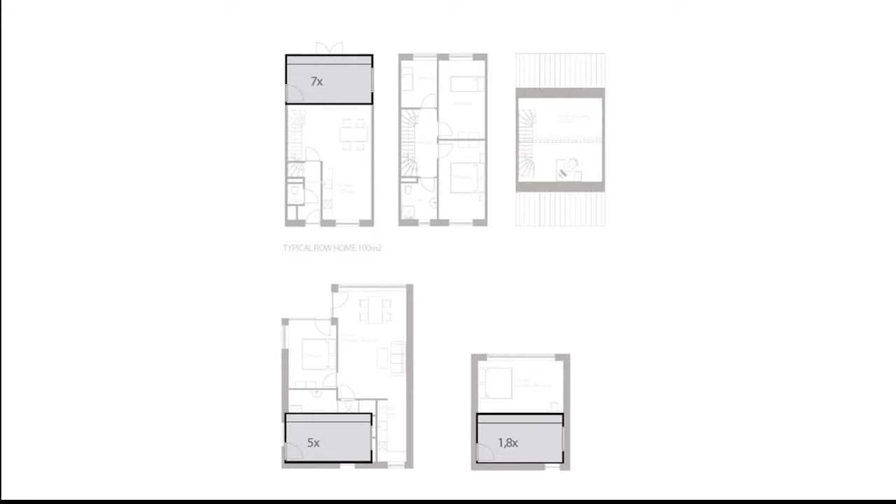Urban wanderers have no place to go due to the tight housing market and tight regulations, while at the same time there are a lot of vacant and oversized buildings. So why not partially use them and optimize them to provide smaller houses, and thus create more houses?

14 square meters is the minimal size that could still fit every living function privately, as later seen in one of the example housing typologies.

And why not evolve from a housing law that no longer fully complies, by giving back the freedom of how to use a space to the actual user, so they can decide what functions they want privately, what they want to share, and make cost- and qualitatively-effective choices.

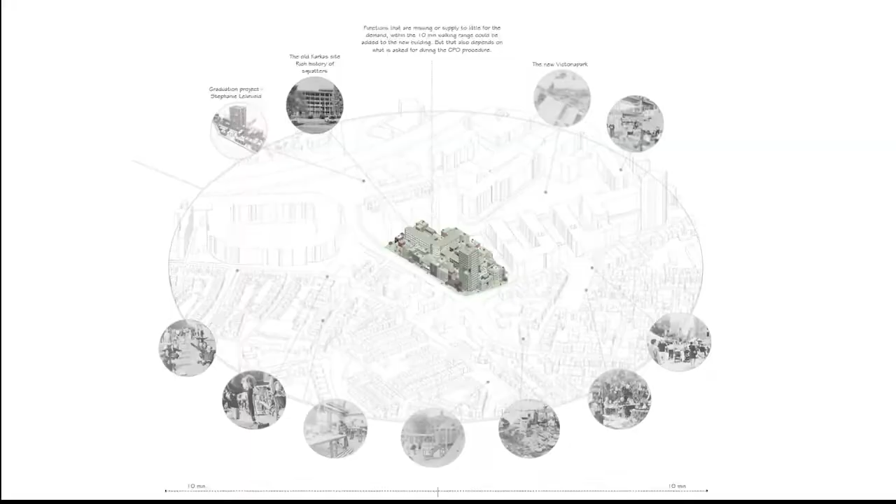The city is a big urban landscape, full of experience in terms of social and professional aspects. Within a 10-minute walking range, you will find a lot of existing functions that you can take advantage of. I know a person that, for example, only showers after going to the gym.

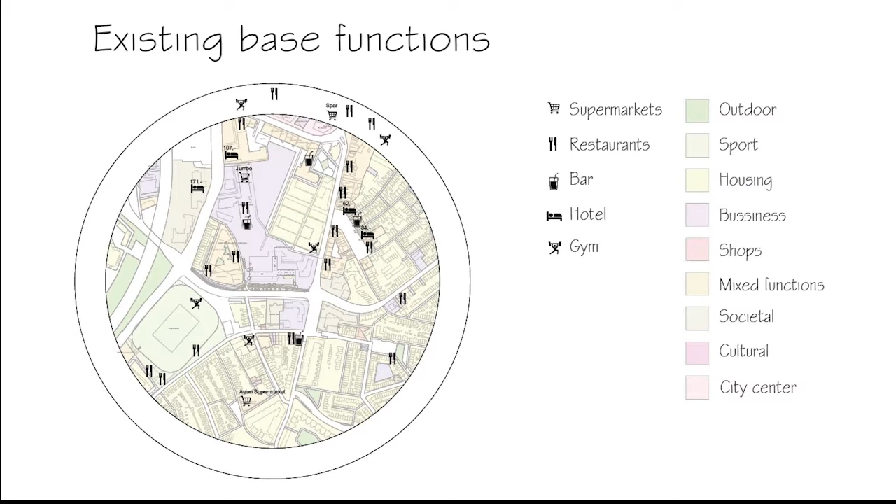He says he rarely ever uses a shower at home, so why have one completely for yourself? You can share facilities or use the spaces within the city that are already there.

The principle of using vacant sites and oversized buildings to fabricate a new architectural model of optimization and freedom of choice could be reflected onto multiple locations.

So now we zoom into the chosen location for this case study project, the old Fuxkas in Eindhoven. A building with a rich history that could be linked back to the time of industrialization. It used to be a former Philips office building, which after its days of glory became a neglected place.

Perfect for squatters to build their home, it on itself became a place full of creativity and optimal freedom. Sadly, the owner thought otherwise and stripped the building down to its core.

And so there the building stood, naked and lost for 12 years long, an eyesore for the locals until its final days. But it didn't have to end this way.

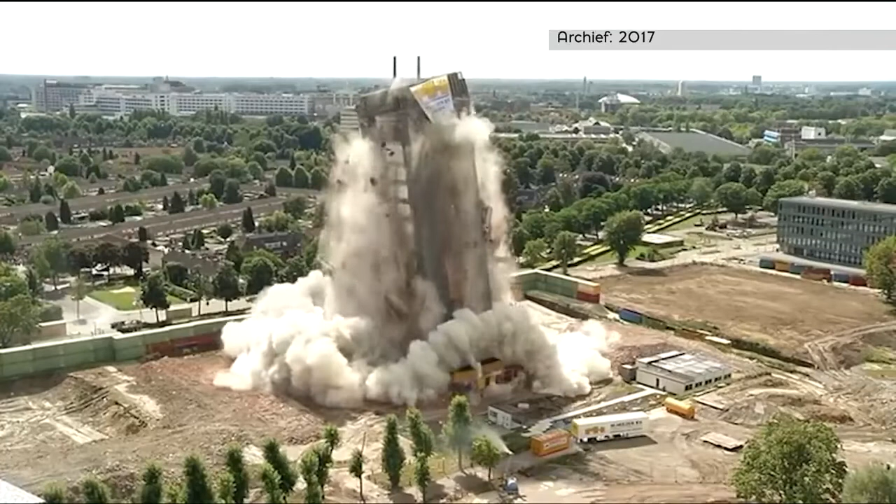Locations like this are perfect for HomeTown, a new approach of home for the urban environment. A building that represents a neighborhood compressed into a high-density, low-rise building.

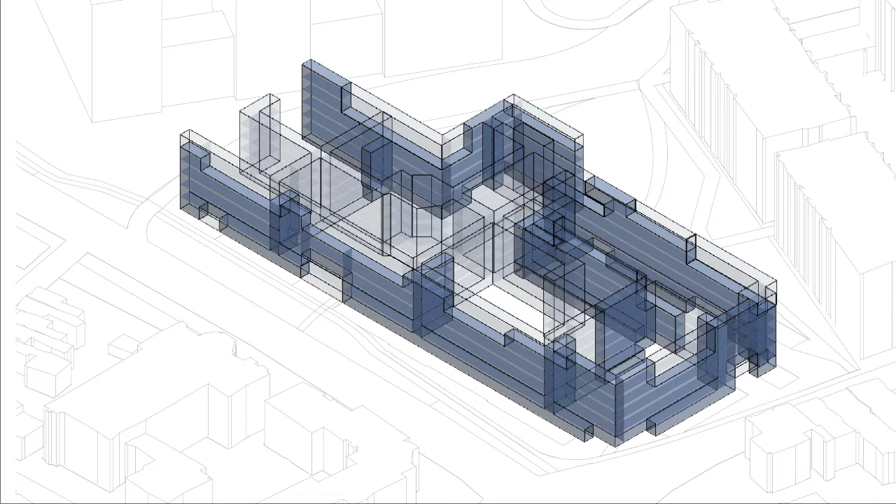With a network of multifunctional collective corridors that are running through the building like streets on a city block, adjacent to the corridors are Casco housing spaces and shared facilities that could be used by all the inhabitants of the building. This compressed neighborhood is divided into smaller communities.

Those communities each radiate their own identity that represents the families living in it. Within those communities, each household has the ability to choose their own living space, the size, what functions they add and what functions they share.

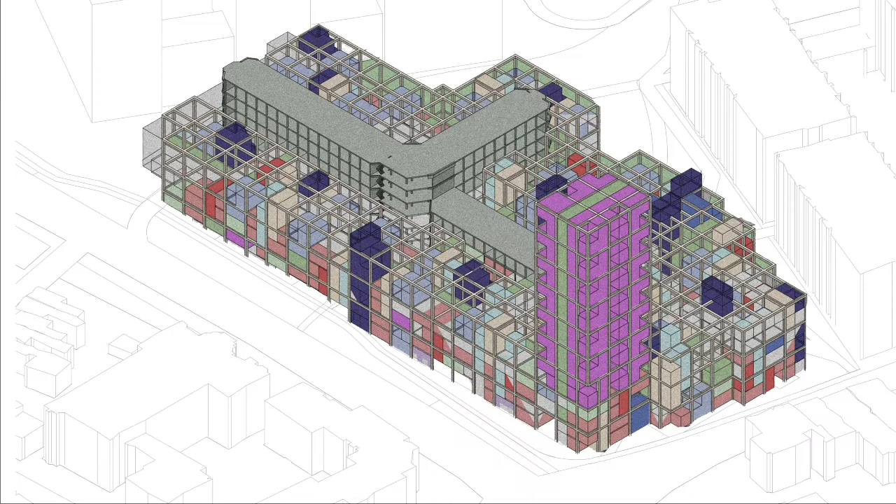The building process could be divided into phases per community, which works through a CPO process. On top of those communities, a network of collective roof gardens are accessible from the shared corridors.

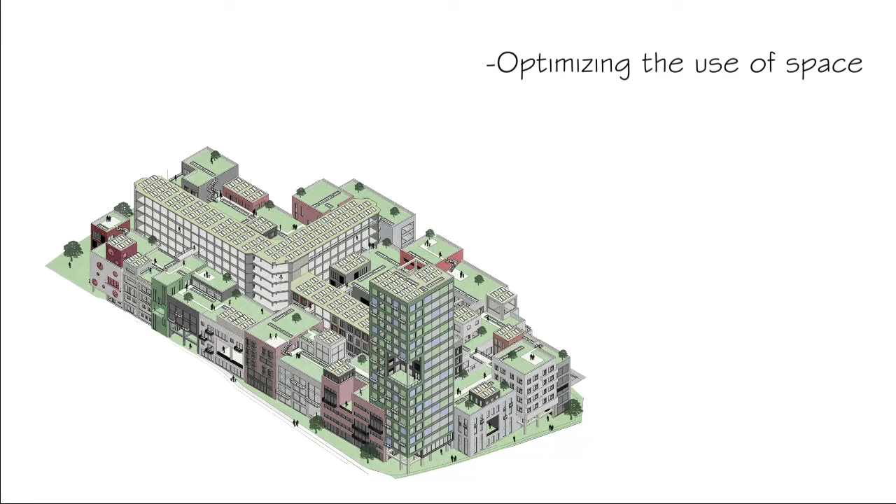The design holds some key principles of optimizing the use of space, making use of the existing functions within a walking range, sharing facilities, giving back the freedom of choice to the user of space on how much space they need, what functions to share and what functions to add, and the possibilities of giving vacant buildings a second life.

Optimizing the use of space could be approached by many different ways. To optimize a plot, there's a few steps to take. First, you start off with a new or an existing plot, which might or might not have a vacant building.

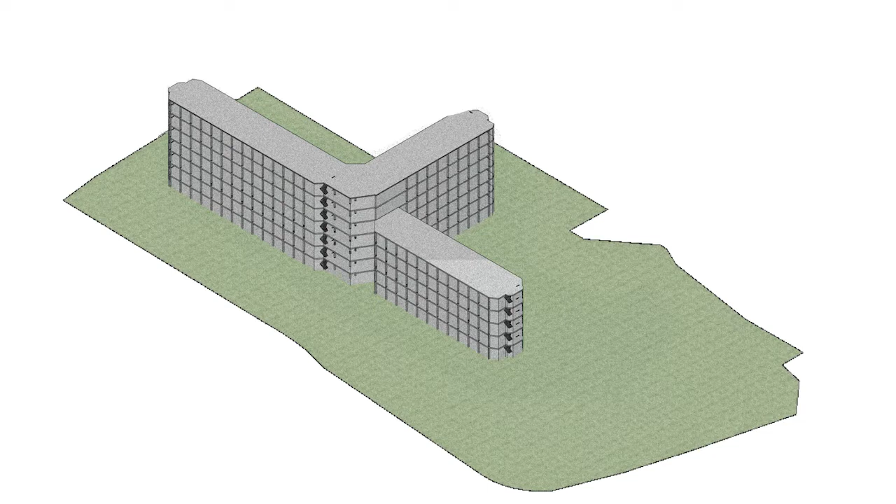Strip that building down to the structural base. Lay a standard building grid of 3.6 meters by 3.6 meters on top of the plot. Fill the plot fully with mass.

In this study, the max height for the highest front door is 4 layers, which is under 12.5 meters to avoid the necessity of elevators. A 5th or even 6th layer could be added when a multiple story typology is added to the highest level.

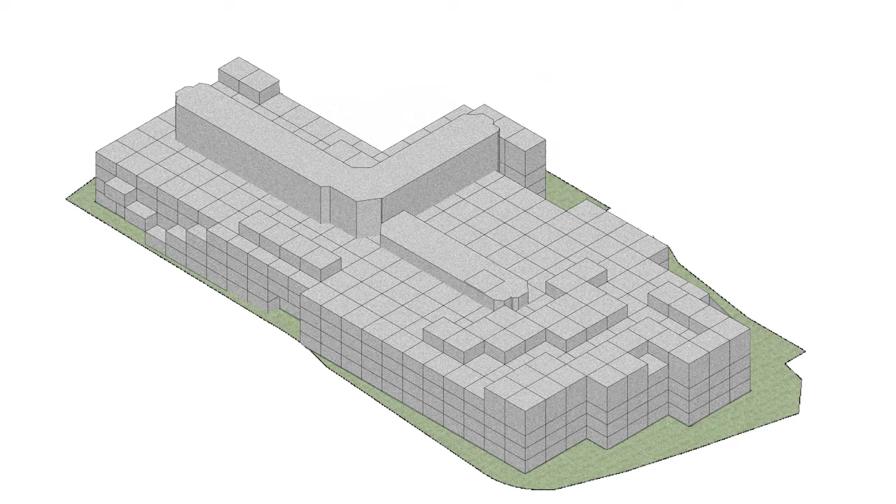Extrude the masses that block daylight. After the extrusion, all the leftover masses should get enough one-sided daylight, so the housing units could be a maximum of 7 meters deep.

Extrude the masses that block the main walking routes. Connect the masses to the existing building.

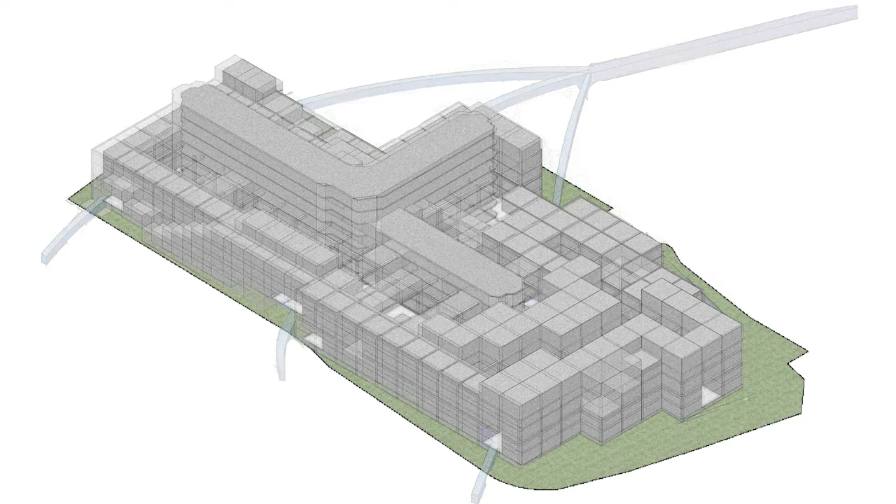Create an internal network of corridors with horizontal and vertical routing. Create a network of external walking routes, mirroring the corridors so every roof space could be reached and used optimally.

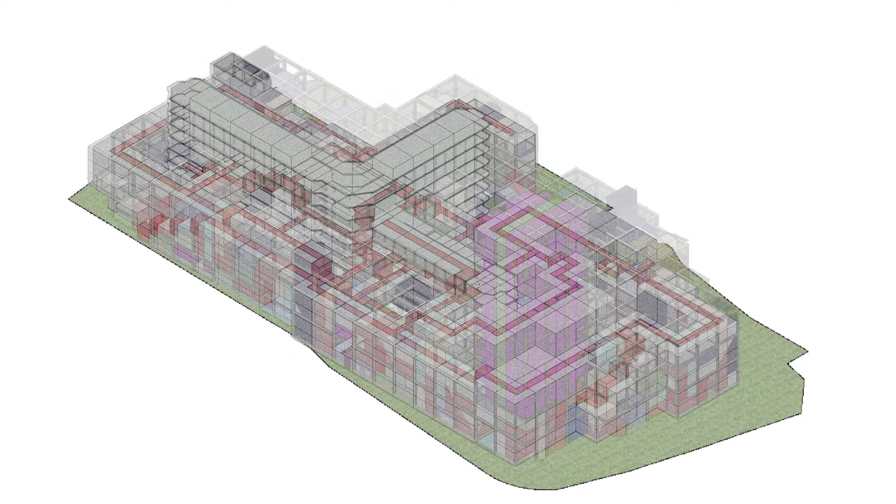Finally, during the CPO process, when the new users of the space have chosen the amount of space they want to use, fill in the housing typologies. A parametric program could be used.

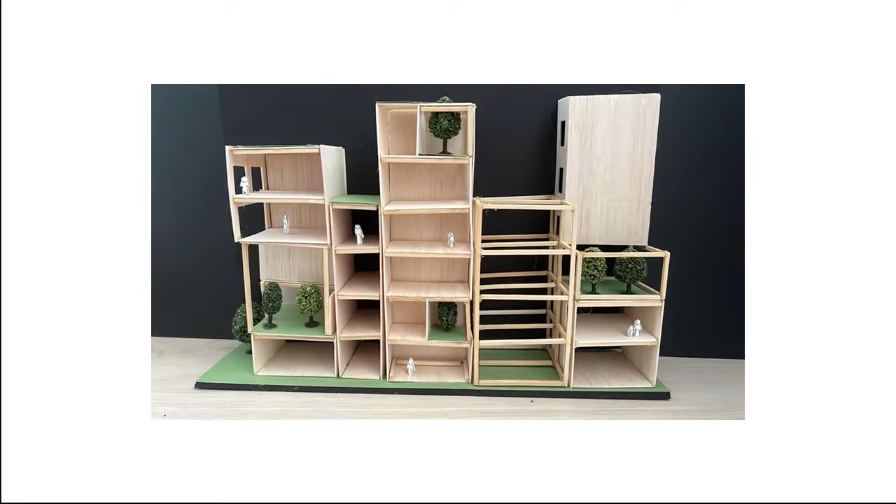The use of corridors and back-to-back typology system ensures that a full mass could be filled up with only single starter studios when necessary.

This gives us a new carcass. A building that has shared facilities and extra requested urban functions.

This community chose to share a kitchen and a dining room, for example. As a community, they maintain this space, and other communities could also make use of this space, with a small extra fee for cleaning and maintenance.

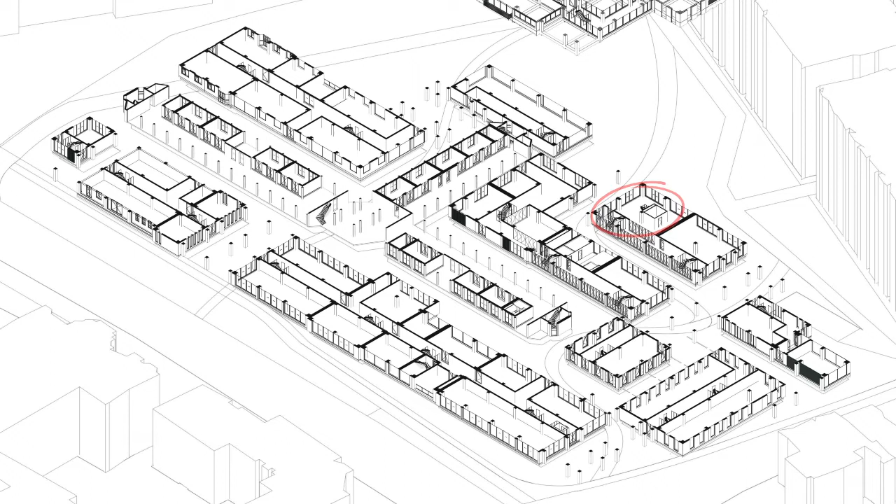People from outside the new carcass could visit this place by just paying a regular entrance fee. The urban passages have been taken into account. The corridors connect the communities like the streets connect the city blocks.

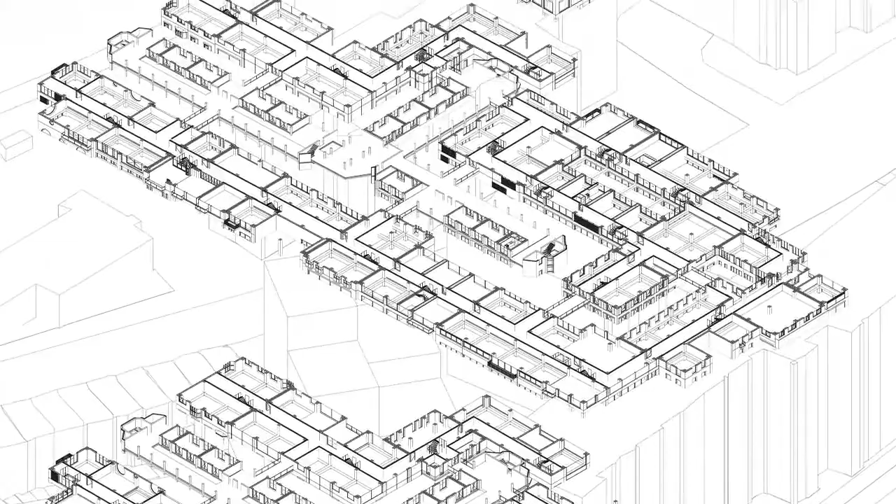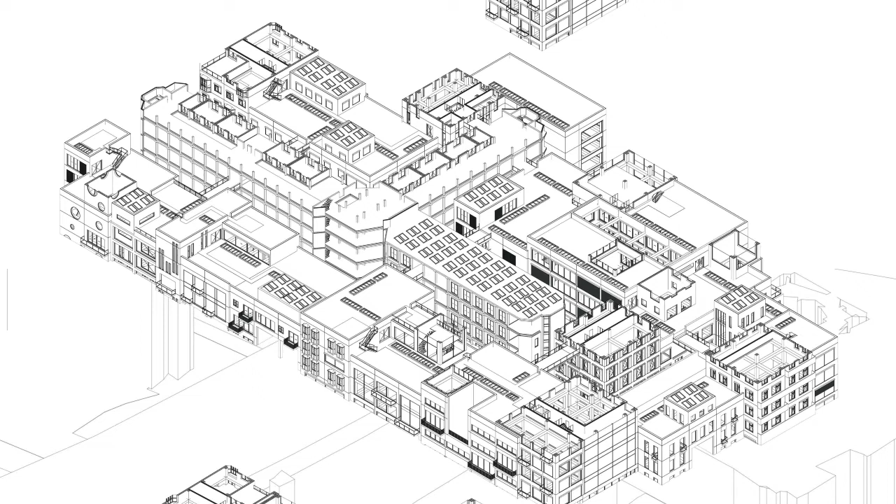The communities beneath those rooftop gardens maintain the space, get to decide what to do with this outdoor space, and have full collective ownership, under the condition that the outdoor space is accessible and approached as a semi-public outdoor space.

This community is much higher than 4 levels. It is a community with multiple one-level housing typologies, mainly for elderly couples. They chose to add an elevator.

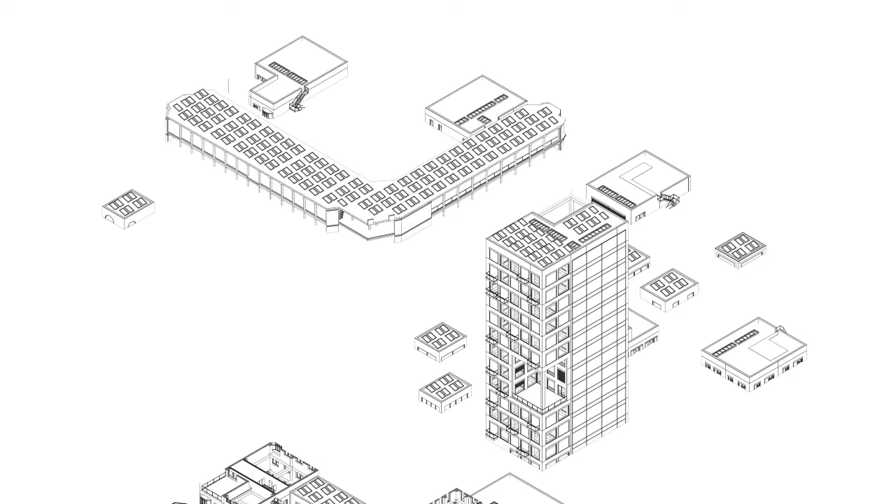For the people that want some inspiration for the finish of their housing units and who want to know how much space they actually need, there is a library of example housing typologies.

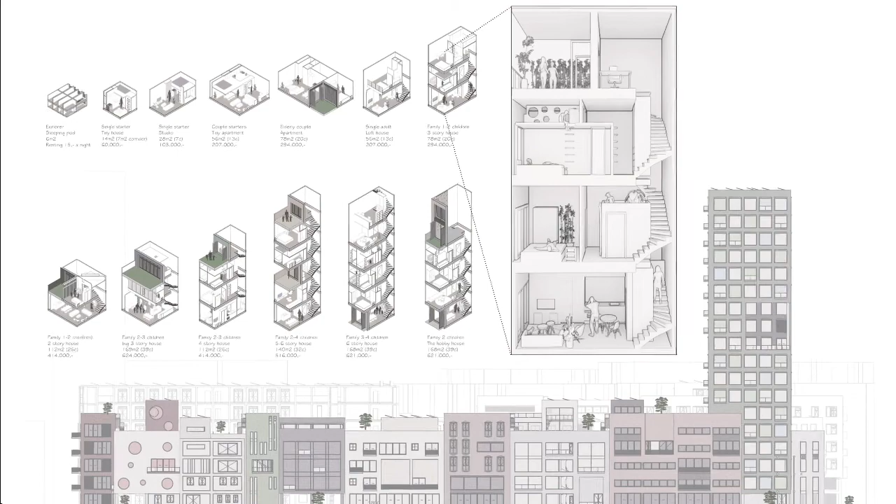Those example typologies are based on sizes that fit within a standard grid, so they could also fit within an existing building structure, like the carcass. They all have the regular housing functions privately, but of course to save space, you could leave out the bathroom or kitchen and share those functions, or go for a smaller typology and make use of a shared living space.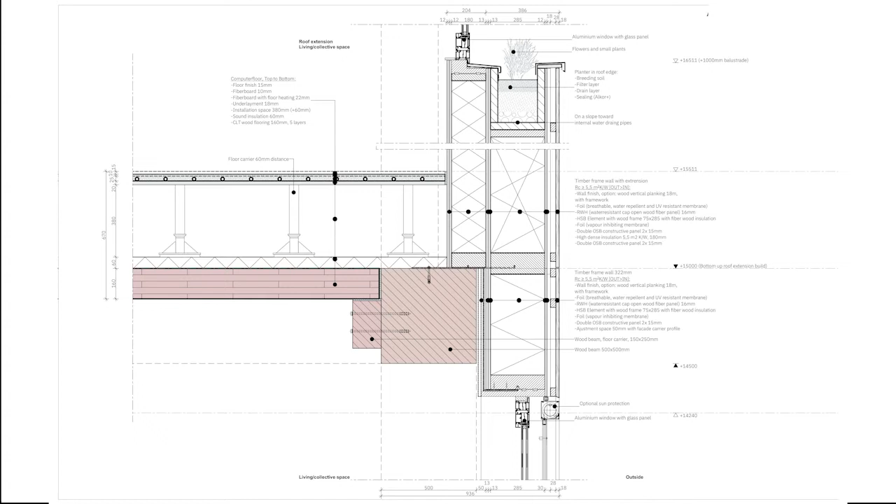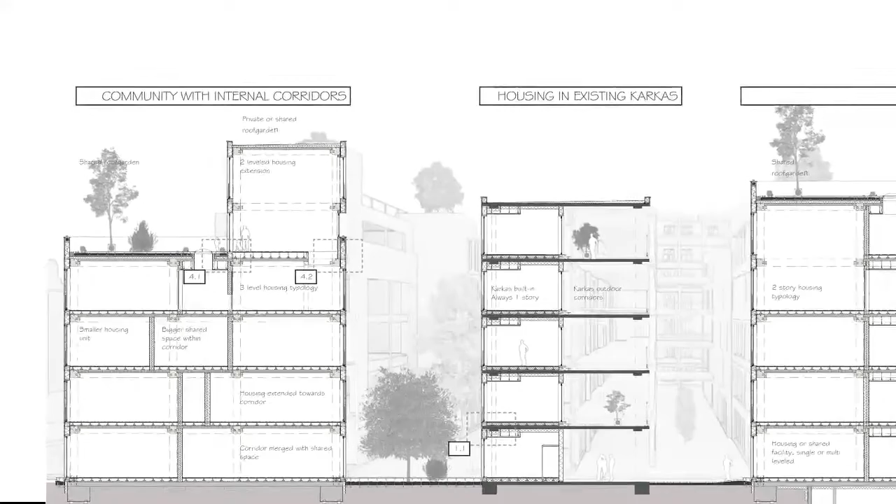This brings us to the community with internal corridors. The detailing principles are the same as the community with the light garden. In this community you can clearly see the multiple uses that the corridor has. It could be used for horizontal and vertical routing, for shafting, to add social meeting spots, to extend shared and private facilities, and to include it by the shared social functions.

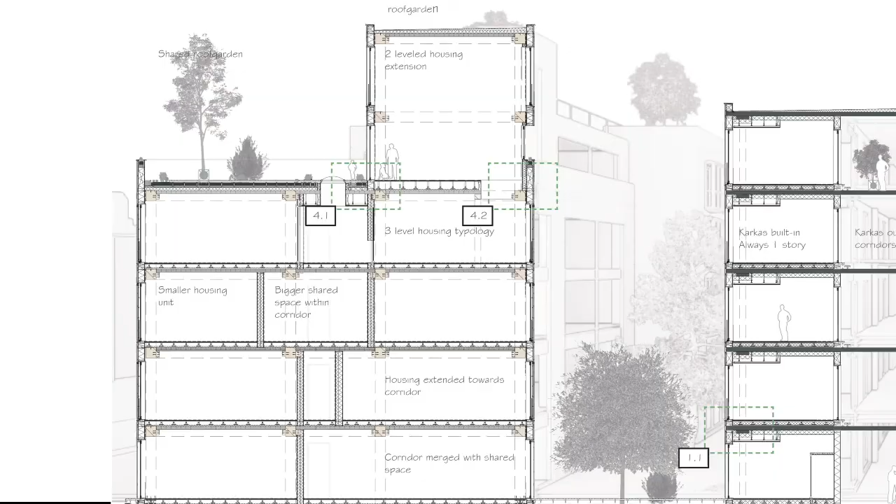Thank you for listening to my presentation. I would like to note that with the HomeTown principle, a high density within the inner city could be accomplished, while at the same time avoiding putting people in boxes, as they now can decide how they want to live, how much space they actually want to use, and what functions they want to share.

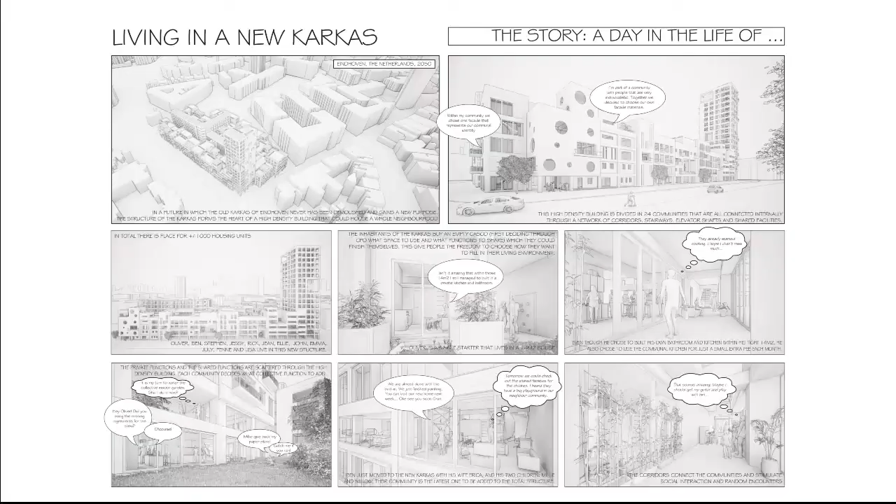Before I wrap it up, I want to give you a sneak peek in how the HomeTown could look like in 2050. This is the story in a day of a life of the inhabitants. Eindhoven, the Netherlands, in 2050.

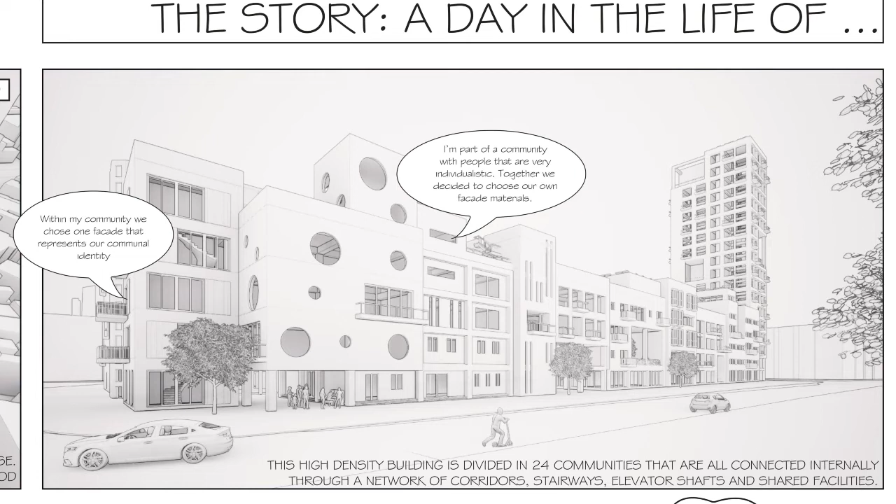Within my community, we chose one facade that represents our communal identity. I am part of a community with people that are very individualistic. Together we decided to choose our own facade materials. In total, there is place for around 1,000 housing units.

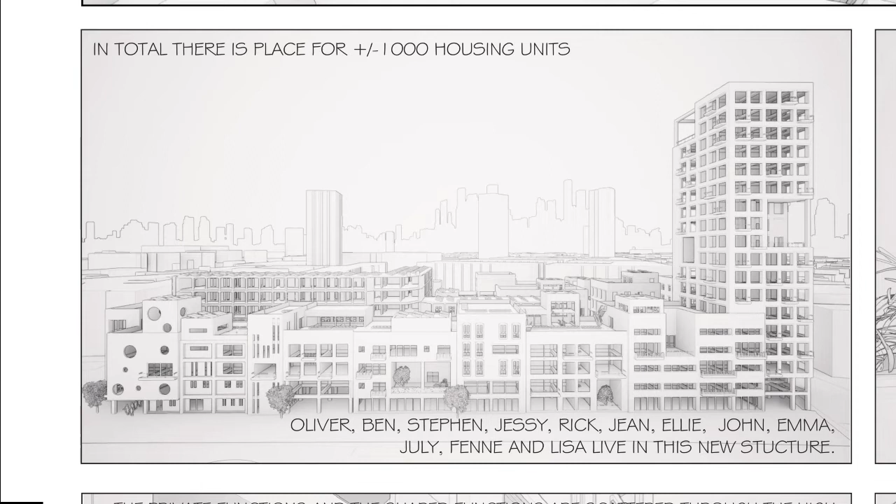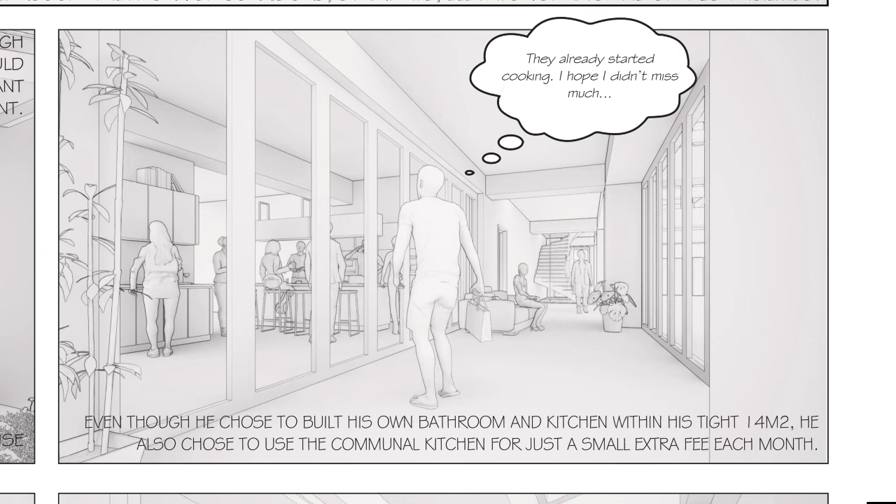Oliver is a single starter and he chose to live in a 14 square meter house. Isn't it amazing that within those 14 square meters he still managed to build in a private kitchen and bathroom? Even though he chose to build his own bathroom and kitchen within a tight 14 square meters, he also chose to use the communal kitchen.

Hey Oliver, did you bring the missing ingredients for the stew? Of course!

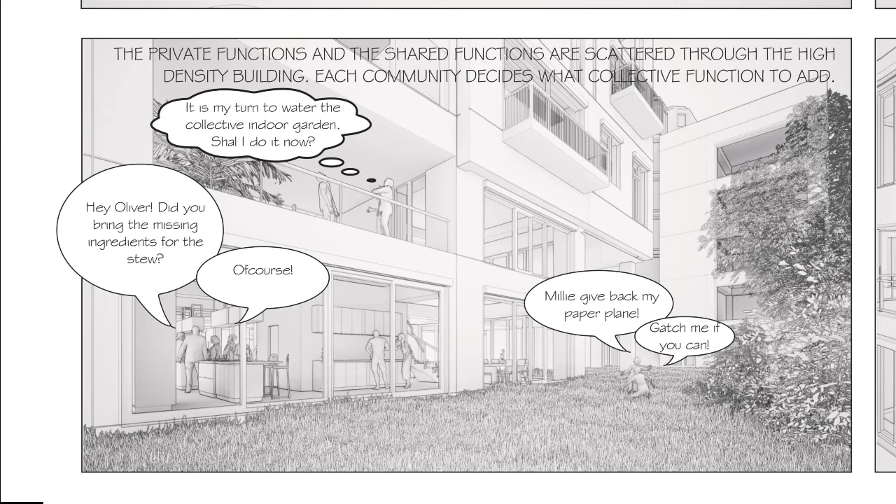Ben just moved to the new Karkas with his wife Erika and his 2 children, Millie and Willow. Their community is the latest one to be added to the total structure. Tomorrow we could check out the shared facilities for the children. I heard they have a big playground in our neighbor community.

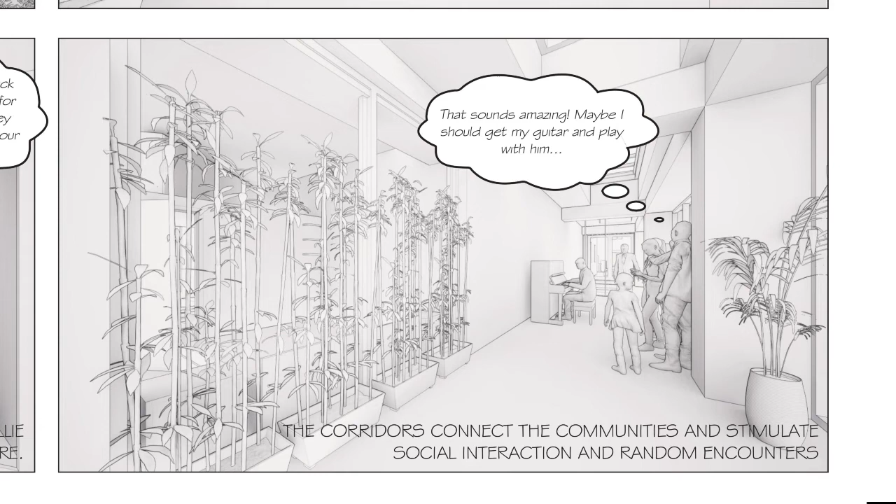The corridors connect the communities and stimulate the social interaction and random encounters. The corridors are wide so they could be used for multiple purposes: space for expanding houses, social functions, vertical and horizontal transport like stairways, shafts, and outdoor space.

Jessy, the elevator is this way. I want to take the stairs this time.

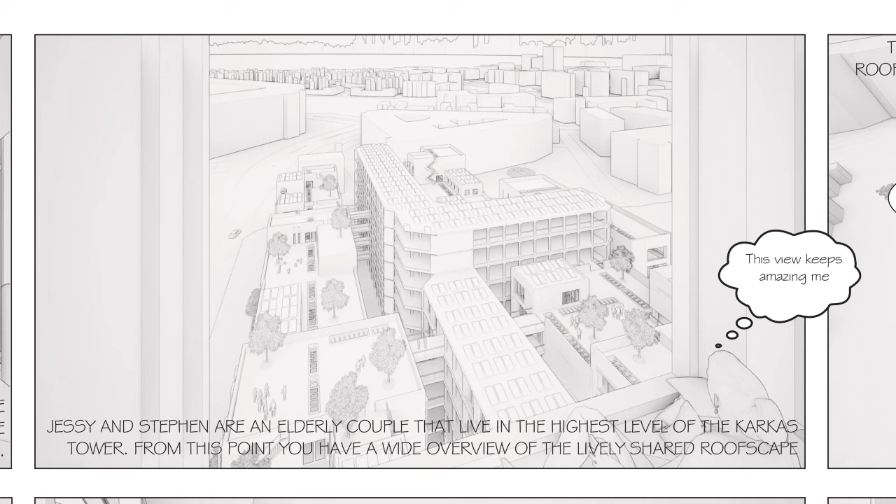Jessy and Stephen are an elderly couple that live in the highest level of the Karkas Tower. From this point you have a wide overview of the lively shared roofscape.

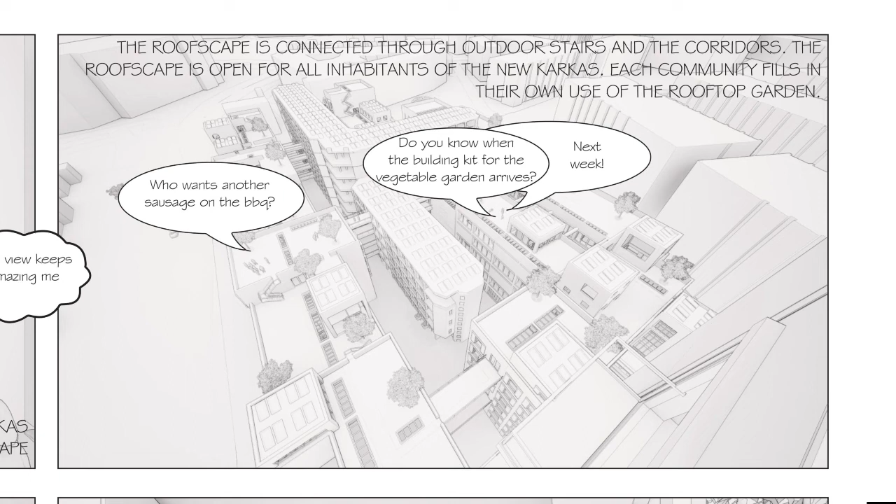Who wants another sausage on the barbecue? Do you know when the building kit for the vegetable garden arrives? Next week.

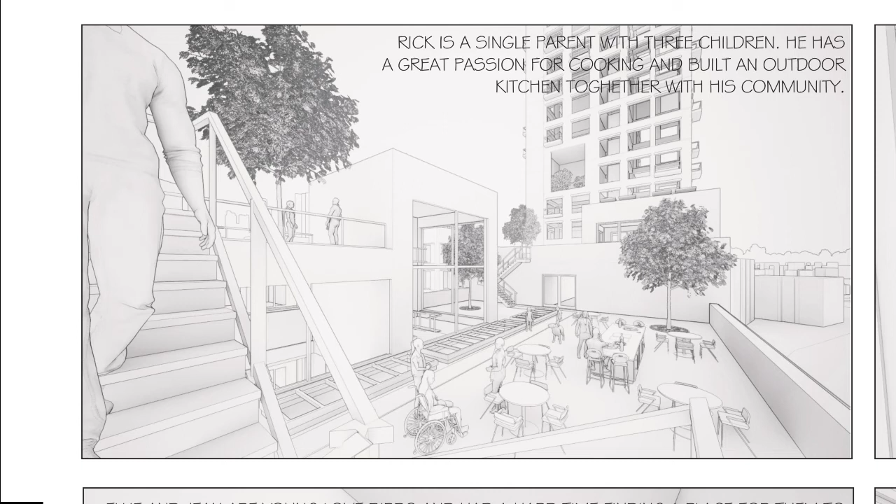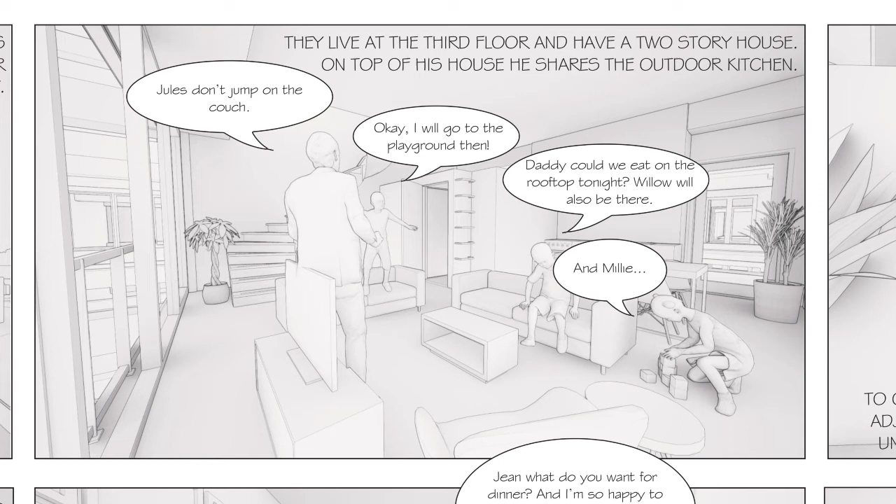Rick is a single parent with 3 children. He has a great passion for cooking and built an outdoor kitchen together with his community. They live at the 3rd floor and have a 2-story house. On top of his house, he shares the outdoor kitchen.

I got my hands full with those 3 children. Luckily, they have a lot of friends within the community. They will keep them busy.

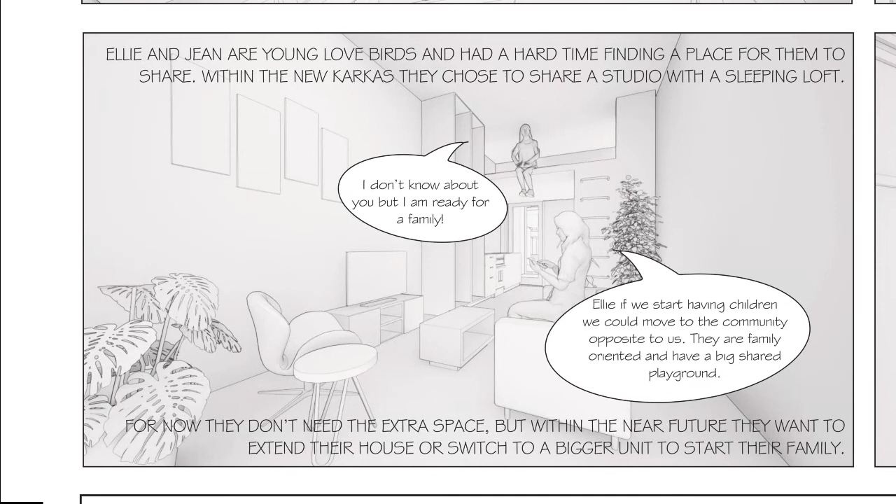Ellie and Jean are young lovebirds and had a hard time finding a place for them to share, but in the new Karkas they chose to share a studio with a sleeping loft.

Jean, what do you want for dinner?

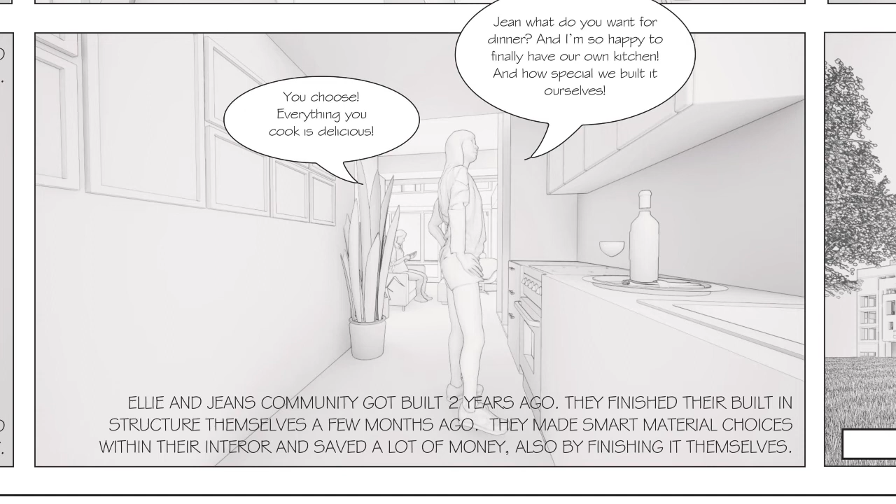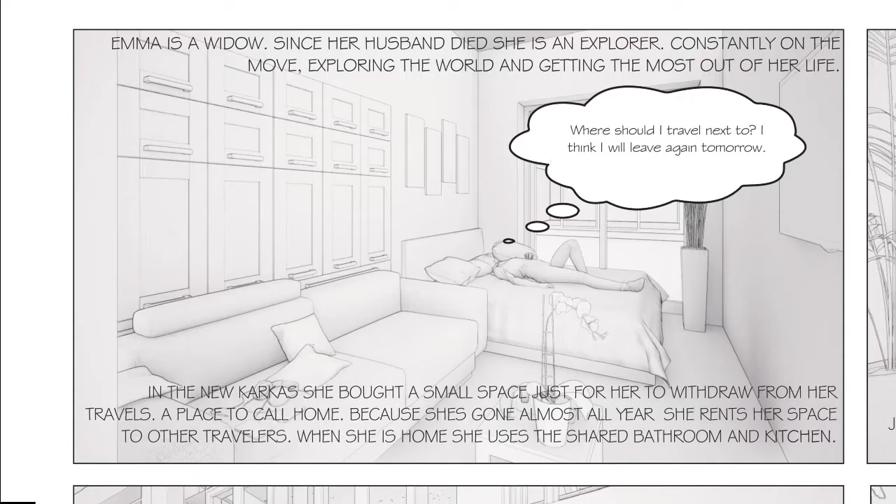Emma is a widow. Since her husband died, she's an explorer, constantly on the move, exploring the world and getting the most out of her life. In the new Karkas, she bought a small space, just for her to withdraw from the travels, a place to call home. Because she's gone almost all year, she rents her space to other travelers. When she's home, she uses the shared bathroom and kitchen.

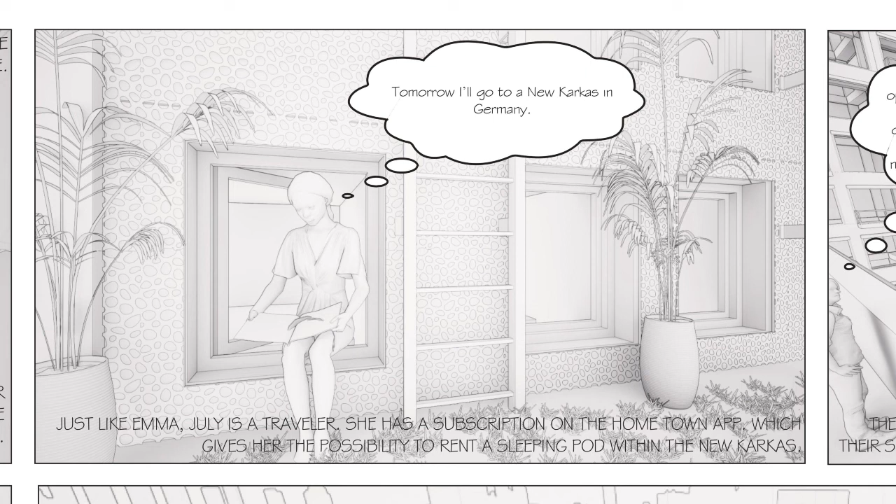Just like Emma, July is a traveler. She has a subscription on the HomeTown app, which gives her the possibility to rent a sleeping pod within a new Karkas. The HomeTown app provides a way for communities to communicate and arrange their shared facilities, additional fees for sharing and connecting to the other inhabitants as well.

I think I will subscribe for the option to use the shared kitchen. It could be fun eating and cooking collectively.

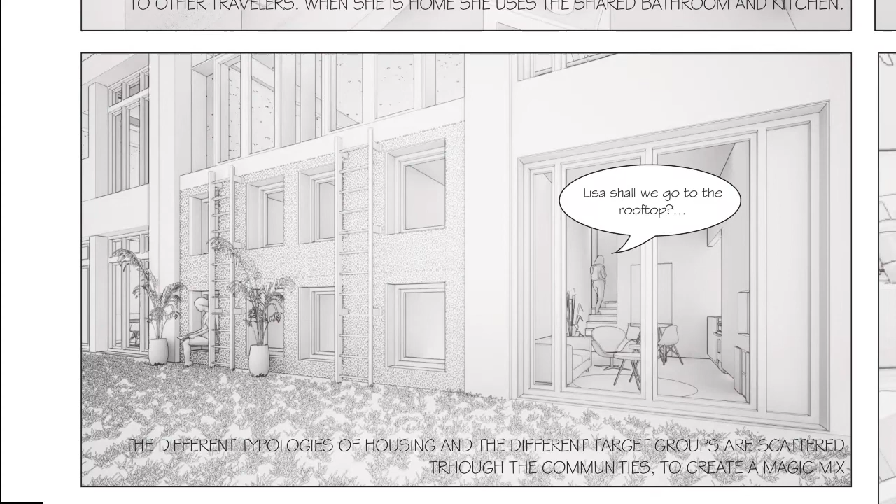Lisa, shall we go to the rooftop? Yes, I'm coming!